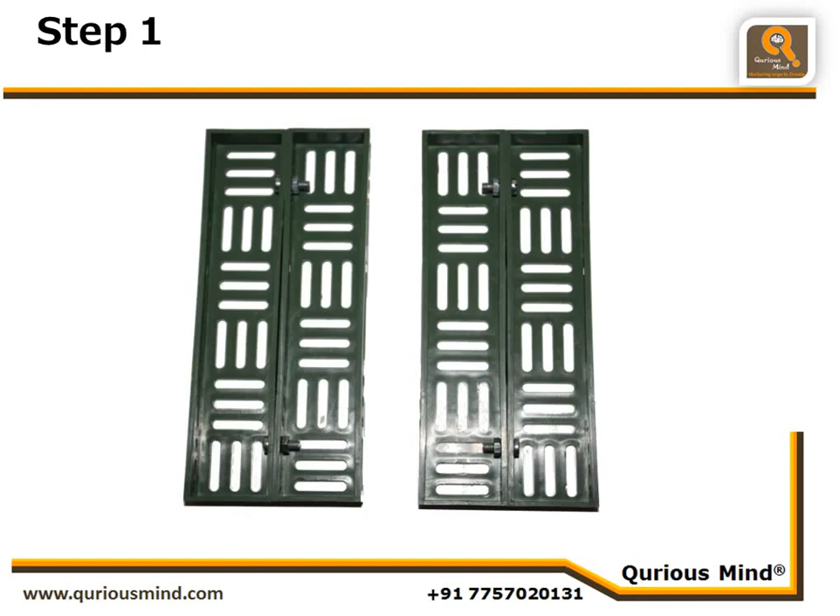Here is step 1. We take two C plates and join them using two nut bolts here. Similarly, we take two more C plates and join them using two nut bolts. This will act as the base of our crane.

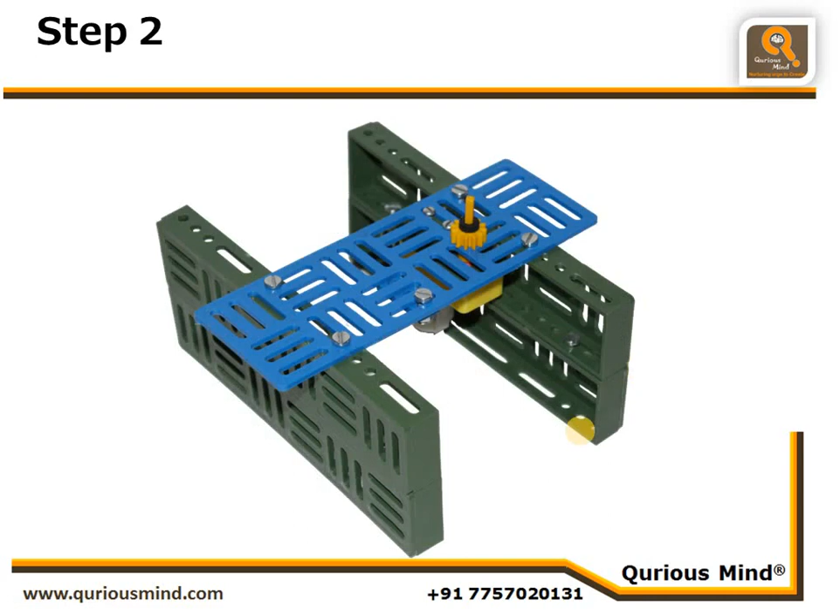In step 2, we will use one rectangular plate and we'll connect that rectangular plate to the base using four nut bolts. One here, here and here. And then we will attach a DC motor with motor shaft onto the rectangular plate.

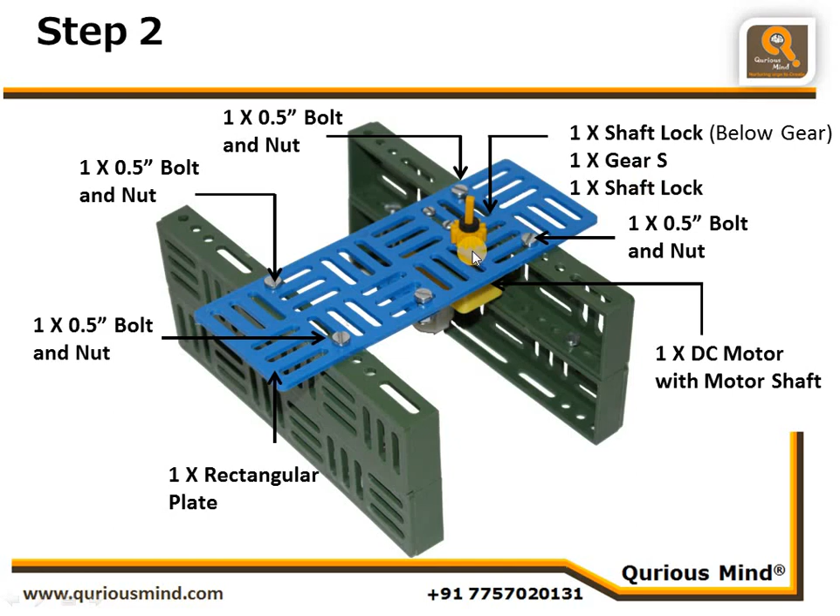If you see, here are the motor screws, and then on the motor shaft we will use one shaft lock which is sandwiched between the gear and the rectangular plate. Then there is a gear and there is one more shaft lock at the top to secure the gear in place. In addition, we will also create one hole using a flat rotator and a 0.5 inch bolt and nut.

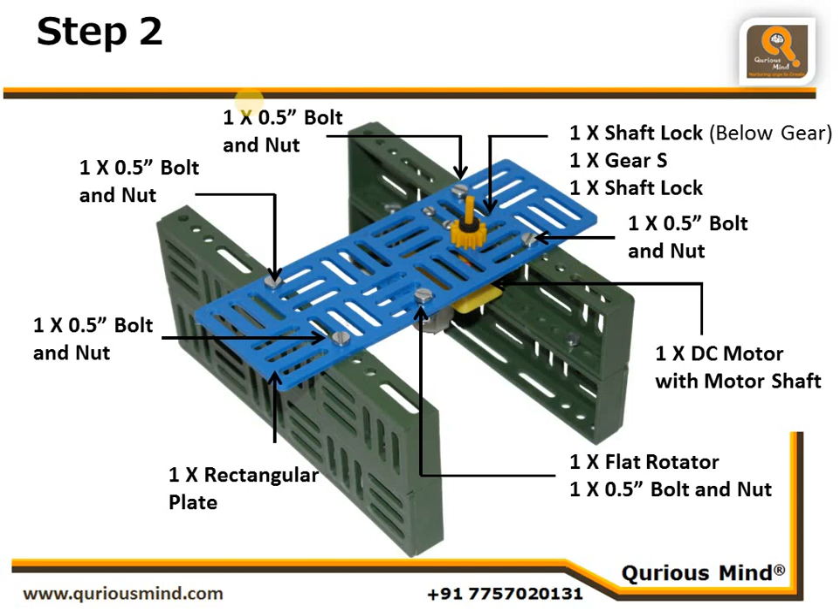In step 3, we will create a gear assembly. We will attach two 1.5 inch bolts onto the gear, tightly connected to the gear only. And then on each of the 1.5 inch bolts, we have placed three spacers.

This gear is now mounted onto the rectangular plate, that is the base, using one axle and one shaft lock sandwiched between the big gear and the rectangular plate. And finally, one more shaft lock, which is to secure the gear at its place on top, and one more shaft lock below the rectangular plate.

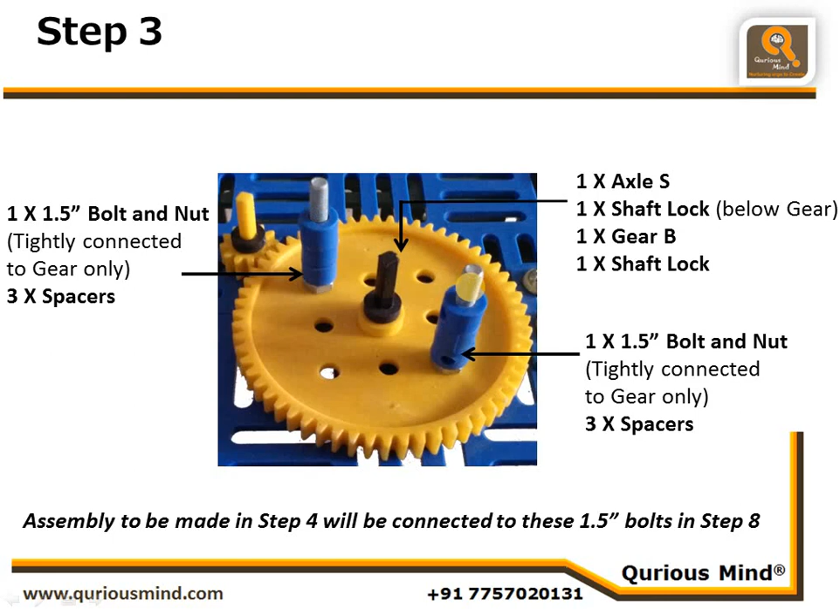We know we put shaft locks to ensure that the axles stay in place. So wherever required, we need to put that. Now, the assembly which we are going to make in step 4 will be connected onto these two 1.5 inch bolts in step 8. So this is the assembly which we are going to create in step 4.

We have two square plates connected to each other using two L connectors and two 0.5 inch bolt and nuts each. Also, we create one hole using a flat rotator and a 0.5 inch bolt and nut. This we'll call assembly A.

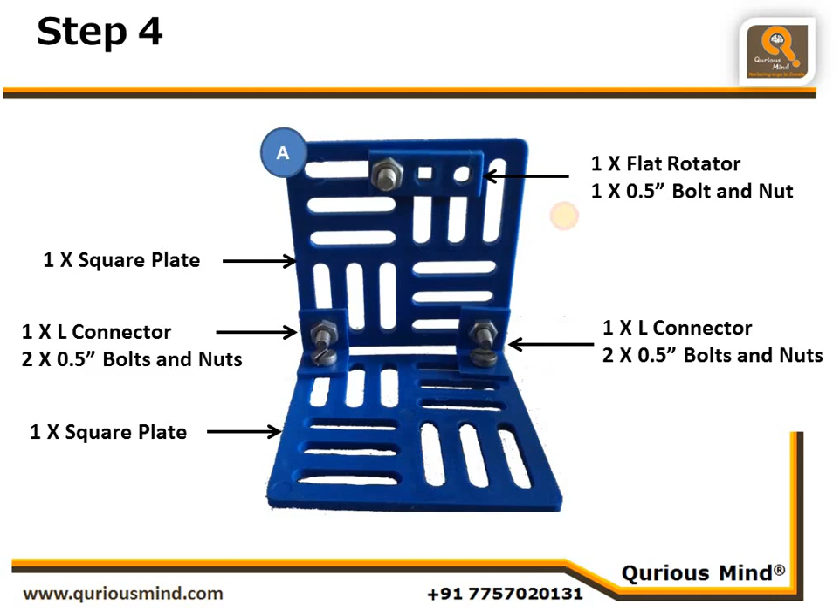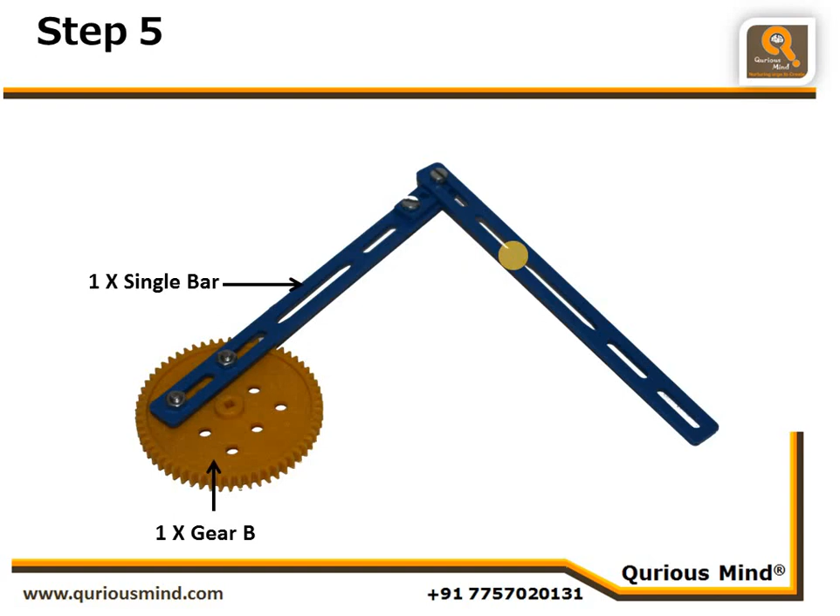Now, another important assembly. Please pay attention here. We are using a gear, big gear, and a single bar, and we are connecting them using two nut and bolts. But between the single bar and the big gear, we have attached two shaft locks, which are not visible because they are below the single bar and above the gear.

Now these shaft locks are put there so that the single bar, when we connect, does not bend, and this single bar, shaft lock and the gear are connected using two 0.5 inch bolt and nuts.

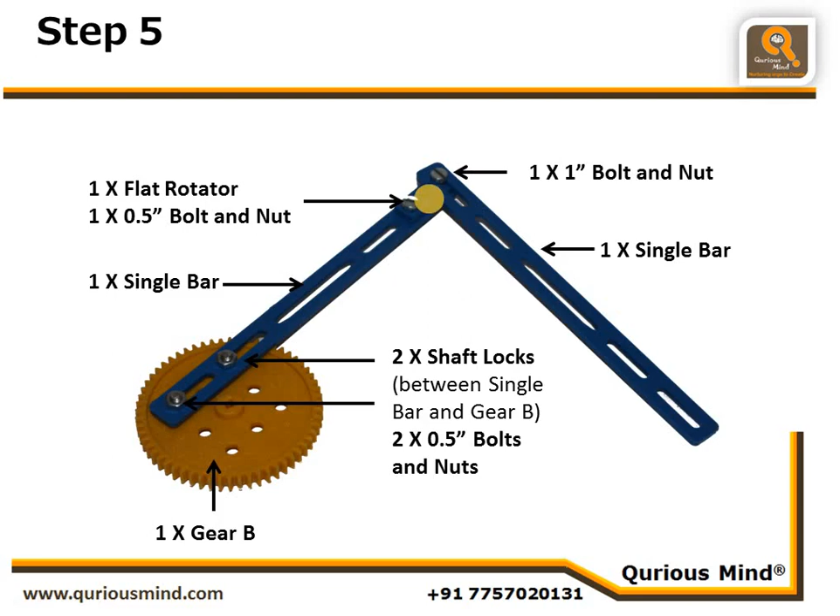We have put one flat rotator at the end of this single bar and created a hole, and in that hole we have attached one more single bar using a 1 inch bolt and nut, and this nut and bolt is loosely coupled. This is not tightly connected, it is loosely coupled. This we'll call assembly B.

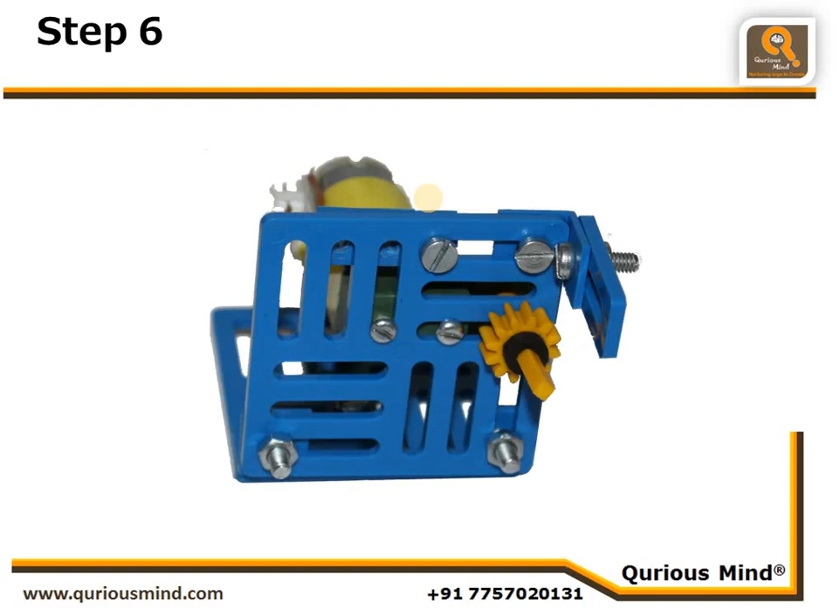Now the assembly A, which we created in step 4, onto that we are attaching the motor. Observe the motor screw positions, and onto the motor we have put first a spacer and then a small gear and then secured it using a shaft lock. So there is a spacer between the gear and the square plate there, which is not visible because it is behind.

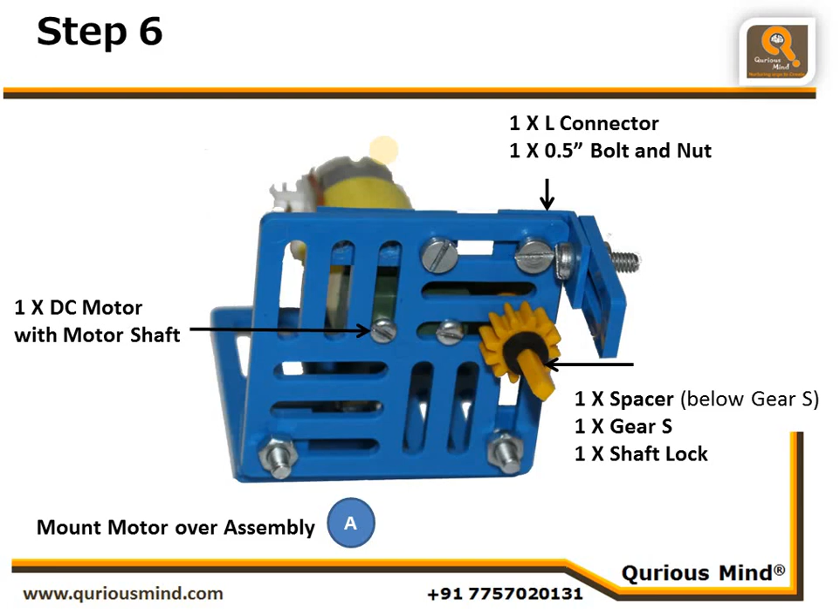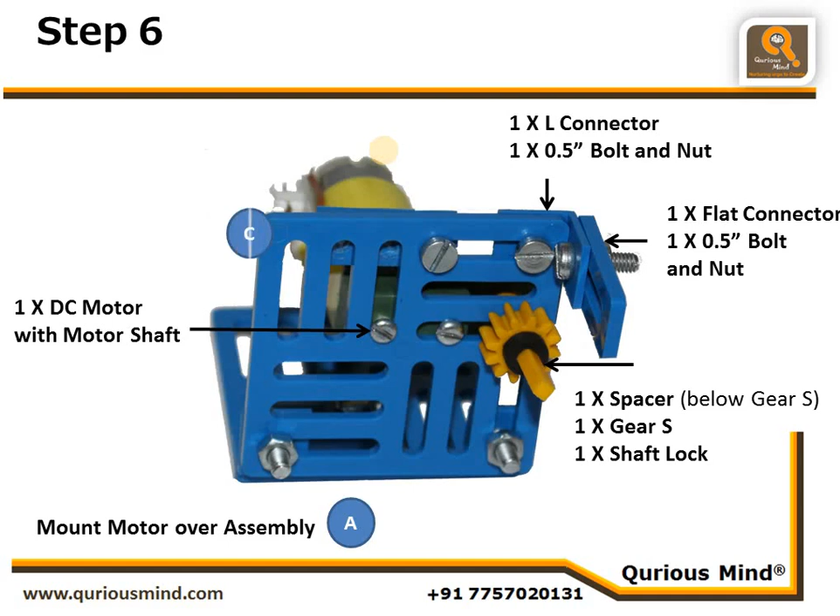We have also connected one L connector, and to that L connector, we have connected a flat connector using 0.5-inch bolt and nuts at both places. This is going to be used as a stopper for our crane's arm. This is assembly C now.

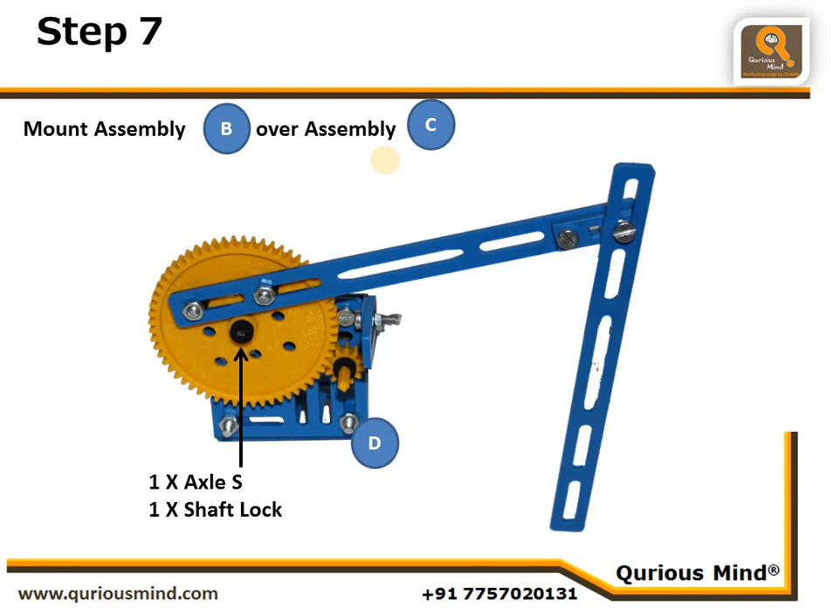Now here we are mounting the assembly B, which is the gear assembly which we created, onto assembly C, which we created in the last step. We had created one hole in assembly B, and through that hole we have inserted an axle, and on the axle we have put the assembly B and locked it using the shaft lock. This is complete. Now we'll call it assembly D.

And now we are going to mount assembly D over the base. We had the base where 1.5-inch bolts are there. Onto those 1.5-inch bolts we are going to mount the assembly D using two nuts tightly connected, and that will complete our crane. This crane can rotate in two directions. One is the entire arm can rotate horizontally, and this arm can go up and down as well.